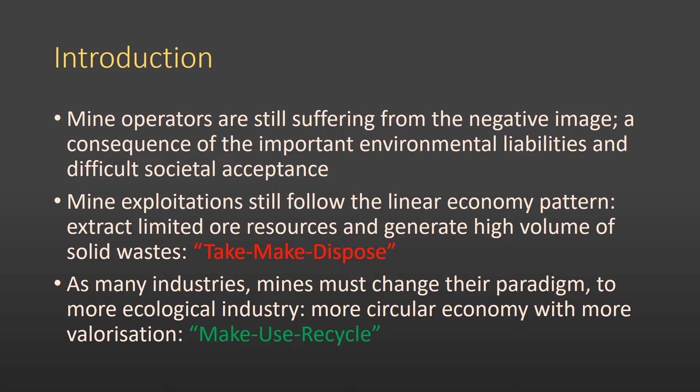So, as with many industries, mines must change their paradigm to a more ecological industry, more circular economy with more valorization. That could be qualified as make, use, and recycle. In this slide, we have two diagrams illustrating this change of paradigm that the mining industry must adopt. At the left, the linear one that still corresponds to the majority of mines, and at the right you have the circular pattern that requires considering resources as limited and minimizing the volume of waste to be stored at the surface of the mine site, tending toward what we call the zero waste objective.

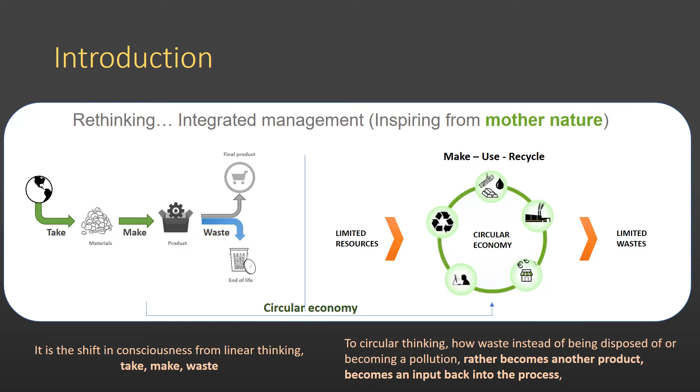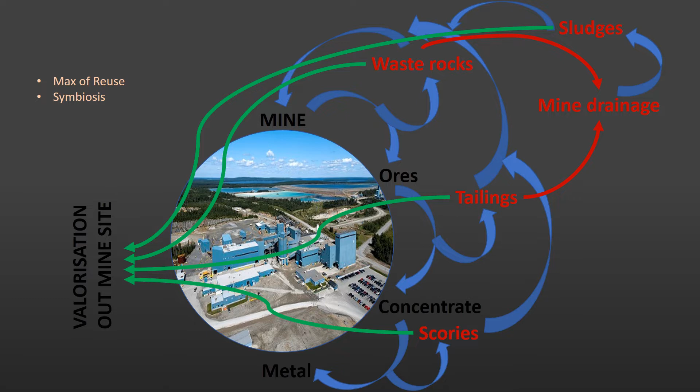Here's another illustration. What we can see in this figure is how mine waste could be managed for more reuse at the mine site and neighboring smelters in the case of polymetallic or precious hard rock mines. This leads at the end to less disturbed footprint and easier site reclamation.

Many terms and definitions exist to qualify these new trends. I like the title of this session, Reframing of Resources. We also have reuse, reutilization, recycling, valorization of course, reprocessing, repurposing, etc. All mean the transformation of wasted material to byproduct or secondary resources when possible, benefiting from the valuable elements that could be occurring. Other consequences are the reduction of the volume of waste to be stored on the surface of the mine site, and the reduction of footprint, and finally a trend toward a cleaner mine and zero waste concept.

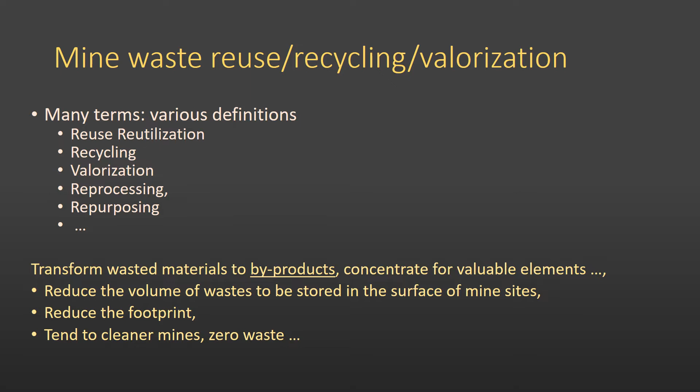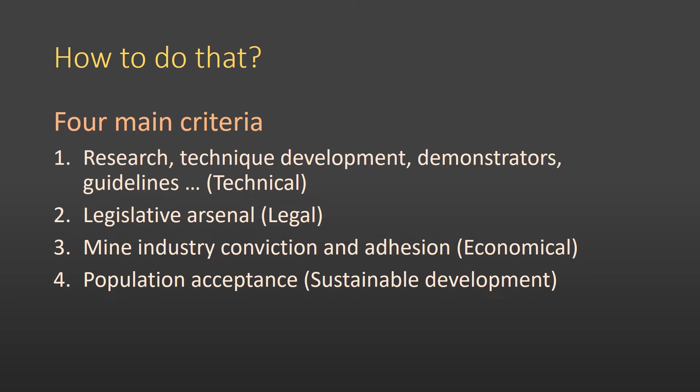Well, how to do that? There are at least four main criteria: technical, legal, economical, and the fourth is about sustainable development. The first one consists of having the necessary research, academic research, technology development, demonstrators, guidelines, and so on. In the second one, we have to dispose of the needed legislation. In the third one, the mine industry's conviction and adhesion is important. They must consider this aspect as being part of their mine life cycle. And at the end, population acceptance is very important. It is very influenced by the first criteria.

So, what's about legislation? Here I will try to show you all the legislative arsenal in the Quebec province in Canada that's still under the federal Canadian legislation for these aspects.

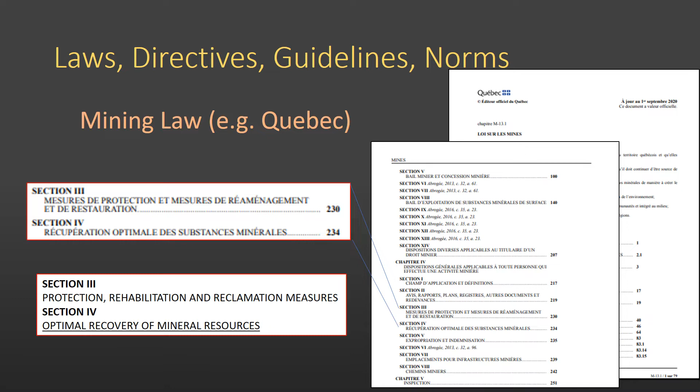So first we have to talk about the mining law, which contains at least two main aspects related to mining and environment. The first one is Section 3 about protection, rehabilitation, and reclamation measures, and Section 4 about optimal recovery of mineral resources. We also have what is called Directive 19 for the mine industry in Quebec. It helps in the selection of environmental guidelines and basic requirements for the different types of mining activities in order to prevent the deterioration of the environment.

The directive also provides stakeholders in the mining sector with the necessary information for the development of the impacts or environmental repercussions study prior to a request for certificate of authorization for a new project or a request for certificate of authorization for the modification of an existing project. All these documents I'm presenting are available for downloading, but in French only.

What's relatively new is the annual duties for all deposition of mining waste in accumulation areas. So since January 2014, each ton of mining waste deposited on the surface in the accumulation area is subjected to a tax, even if temporary, and even if the material could be considered as potential ore. The Ministry of Environment wants to encourage mining companies to reduce or recover the significant amount of mine waste deposited in accumulation areas. The duties are also dictated to participate in the effort to reduce the environmental footprint of mining activities and promote social

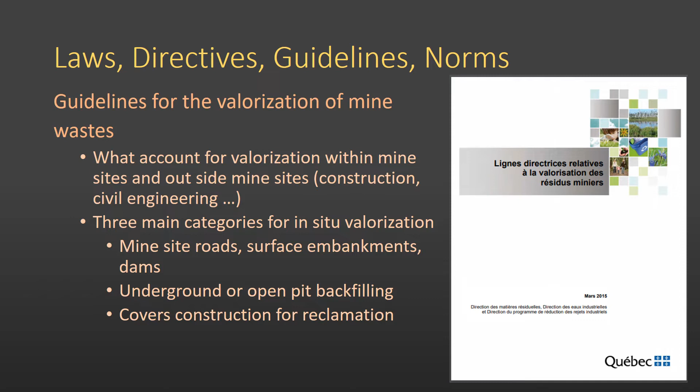So here you have the document which is called the Guideline for the Valorization of Mine Waste. It accounts for valorization within the mine site and outside of the mine site, like for construction and civil engineering. There are three main categories for in situ valorization. First, mine site roads, surface embankments, dams. Second, underground and open pit backfilling. Third, cover construction for reclamation.

Another document for the classification of mine waste to be valorized as resources outside the mine site, mainly for civil engineering, is called the Guide to the Valorization of Non-Hazardous Inorganic Residual Material from industrial sources as construction material. But acceptance remains an important issue.

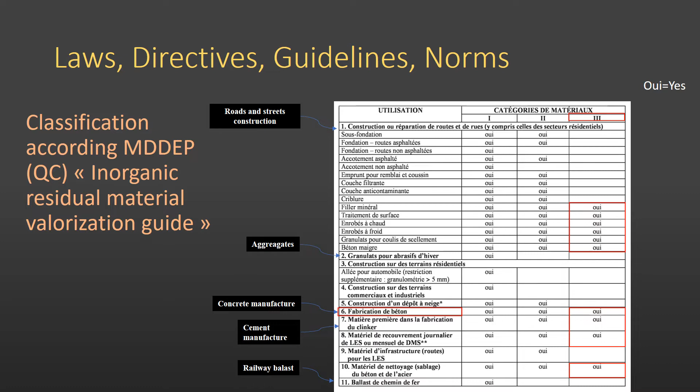Then we have a decision diagram for a multiple level of parameters measurement. The first step of the flow chart consists of the classification of the waste.

Rock sample, if it is non-hazardous or hazardous material, using the chemistry and the metal analysis. The second step is for organic matter content, and the third one is

sulfide content regarding the acid generating potential. This allows us to classify the material as possibly reusable for category 3, which includes concrete manufacture.

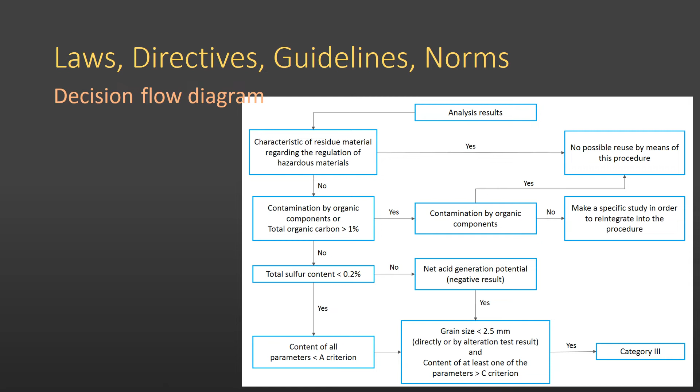Then many steps were described in the document, here illustrated by the succession of these figures, consisting of, on one hand, the comparison of the composition of the waste rock to the criterion A of Directive 19, which allows

classification of the waste rock into category 1 directly if validated. If not, in the case of waste rock with higher sulfide content, and depending on the particle size distribution, waste rock are classified as category 3, and then we could also, following a succession of leaching tests regarding the regulation criteria, classify these waste rock even into category 1 or 2, and at least category 3.

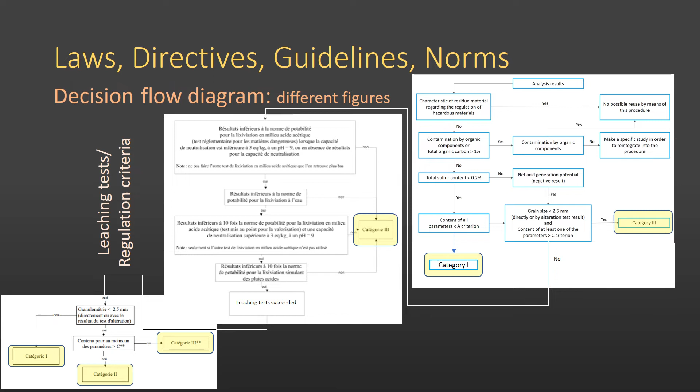So for application and as examples, let's see the case of some Abitibian mine, precious metals mine. These mines are characterized by low grade and high tonnage, usually exploited using open pit mining.

We have, as we've seen, a good legislative arsenal, and we are here in the presence of high potential and opportunities.

The first example is the historical Sigma mine near Val-d'Or in Abitibi. The mine was in operation since many decades underground, then more recently through open pit mining. Now the mine operation is suspended.

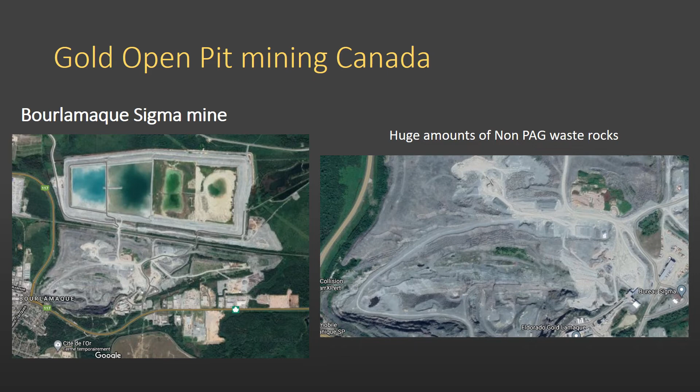Millions of tons of waste rocks have been produced that are non-potentially acid generating.

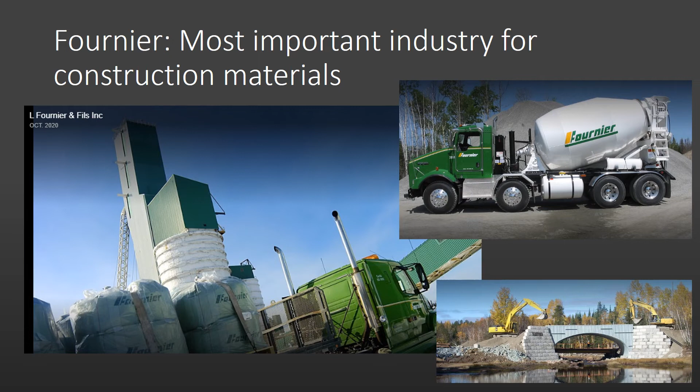On the other hand, Fournier, a leading company and the most important supplier of all construction material in north of Quebec, took this opportunity with the owner of Sigma mine. They bought all rights to exploit these waste rock dumps around Sigma mine, and they are using them presently as construction material for many activities, for road construction, concrete manufacture, and with frequent, of course, control of quality in

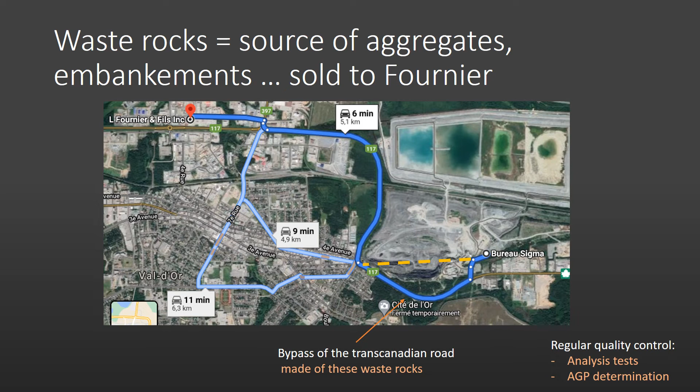terms of potential of acid generating and leaching. The bypass you are seeing here of the Trans-Canadian road is also made of this waste rock.

The second case, another gold mine called Canadian Malartic Mine, which is still operating presently and representing one of the biggest North American gold mines.

It generates 120,000 tons per day of waste rock containing 1 to 5% of pyrite. The waste rock are also classified as uncertain in terms of acid generating potential.

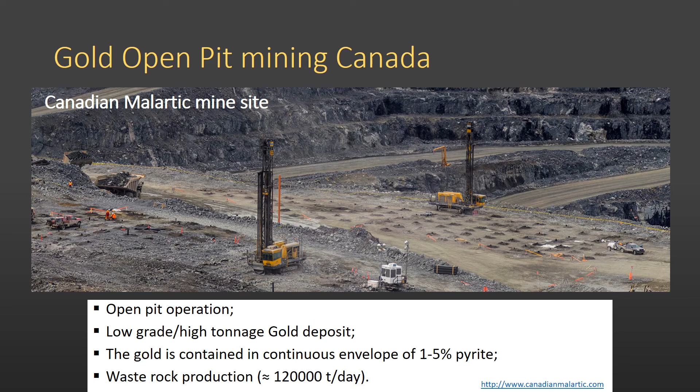For valorization purposes, these waste rocks were sampled carefully through a robust protocol to have representative samples from the pit, then submitted to analysis for the classification purposes as we seen before.

So first, the waste rock must be checked for their toxicity based on their chemistry. If there is no risk of toxicity, the waste rock must be checked for their organic matter content, and if no organic matter content, the waste must be checked for their sulfur as sulfide content.

So if too low, under 0.2%, waste rock samples are guaranteed as category 3 and could belong to more interesting classes as we seen in the previous slides.

If the sulfur content is higher than 0.2, waste rock must be submitted to acid generating potential testing, usually done using the modified acid-base accounting more widely used in Quebec, or the NAG testing.

Then if positive results are obtained, the waste rock could be classified as category 3 depending on the particle size distribution. If not, the waste rock cannot be valorized.

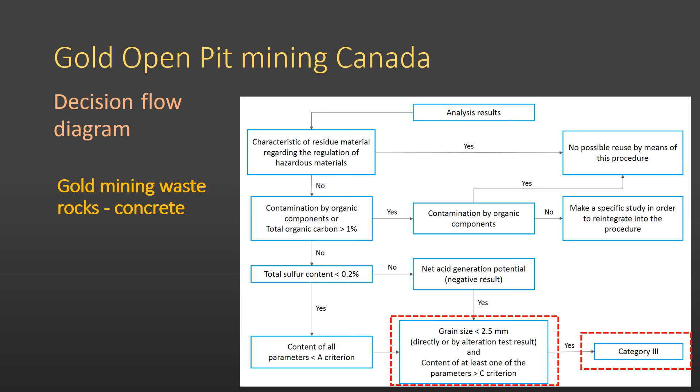Here we could think about reprocessing. That means removing the fine and reactive fraction.

This slide presents the chemical analysis of the waste rocks. In the table here we have on the left, and as we see, the sulfur content is higher than 0.2, so acid generating potential determination is necessary.

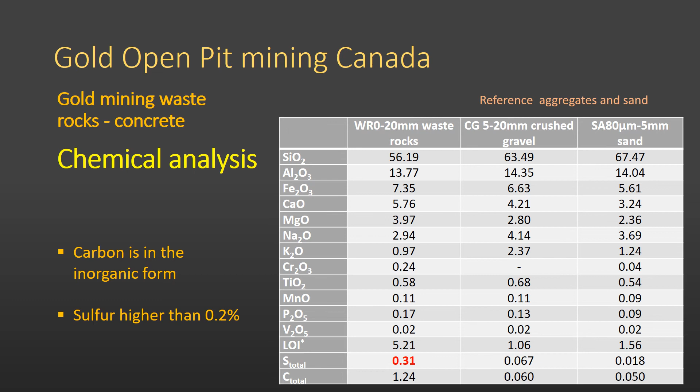We could see also the carbon content, which is higher than 1% and only in the form of carbonates, as we see here in the XRD mineralogy.

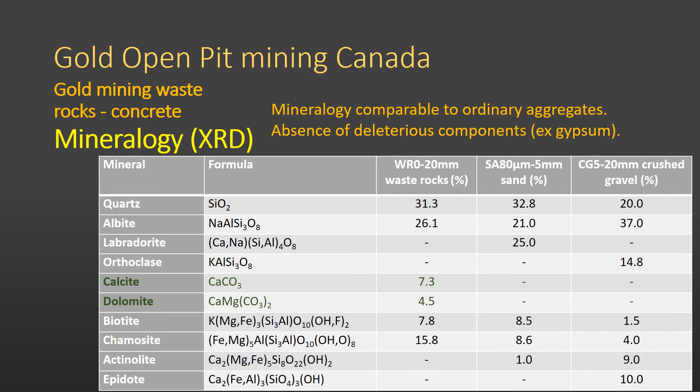This table presents the results of the acid generating potential determination using the acid-base accounting test, and classification was done according to Directive 19. As we could see, the mine waste rocks are non-acid generating.

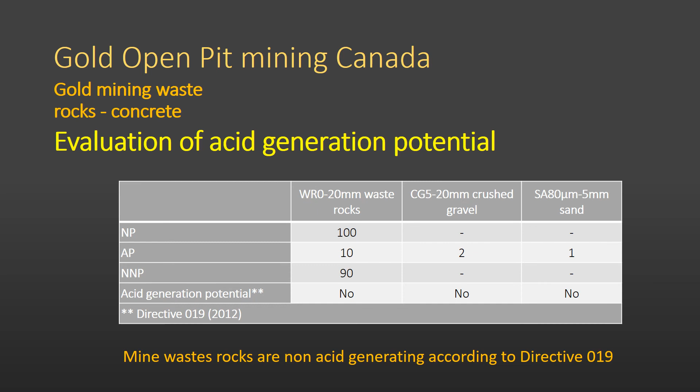Here in this table we have the leaching behavior results according to the TCLP test. Waste rock element release concentrations are presented here on the right of the table. So only some elements' concentrations are over the regulation in terms of criterion C, but all the other concentrations are

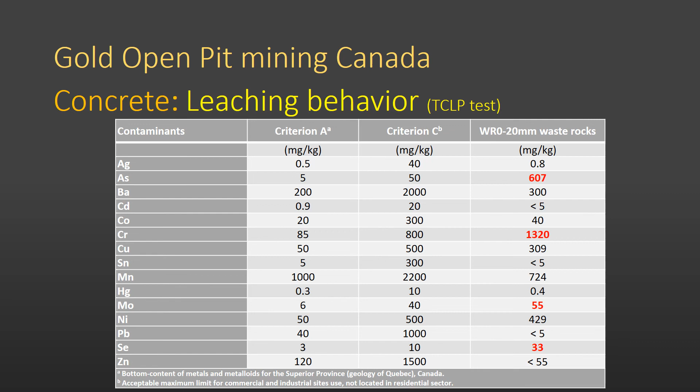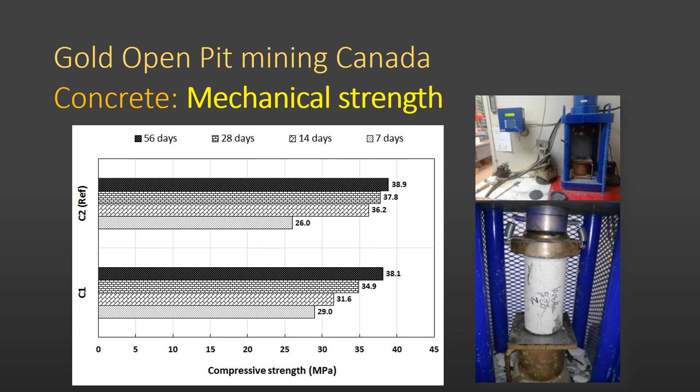below the criterion C. For the manufacture of concrete, some tests are necessary, like mechanical strength. We are noticing here in this figure that the UCS values are comparable to the reference concrete made of natural aggregate. We could also consider waste rock as natural aggregate, with more than 38 megapascals at 56 days of curing.

Concrete samples were also submitted to monolithic leaching tests only to verify if some toxicity is detectable. So as could be easily seen in the figure here, all measured parameters are under the regulation in terms of drinking water.

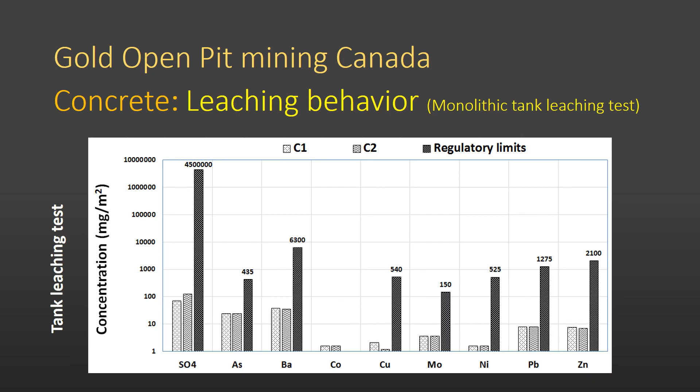As a brief conclusion, mining waste must be managed and considered in different ways. In disruption of the conventional practices, they have to be evaluated accurately through adapted guidelines and classified then for different

valorization purposes. We could also think about reprocessing not only for beneficiation purposes but also for decontamination. Once classified, the product has to be evaluated technically, economically, and environmentally as an end-use product, eco-product. Population acceptability must be there also.